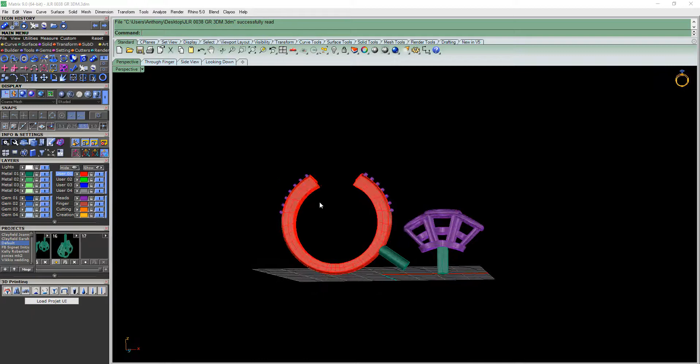Okay, so we've got these two pieces here that we're wanting to support in the Asiga, in Matrix version 9, and then export to the Asiga Composer software so we can create a build.

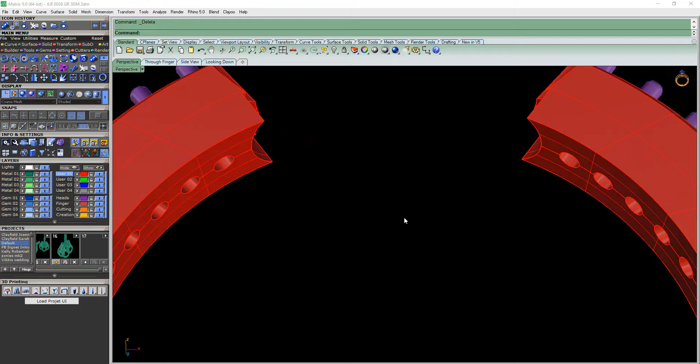Now the first thing I noticed with these is you've got a couple of remnants here, this one here and here. We need to delete those. That's really important. You don't want little floaters hanging around building away, because that could damage your tray, and it's also not very good for the printing of the piece. It can cause issues as well.

So the first thing I'm going to do is select this piece here, and we're just going to hide that. We'll do that one later on. This one here, we're going to delete this sprue because we don't need it. We'll create a sprue with the Matrix 3D printing tools.

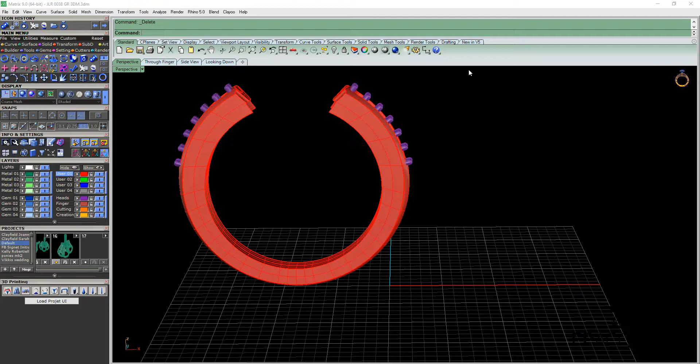So we're going to grab this. Actually, the first thing I'll do is go into the through finger viewport. I'm going to bring out a finger size, size L should be fine, and we'll grab these guys here, pop them all onto the green layer color so they're all where they should be.

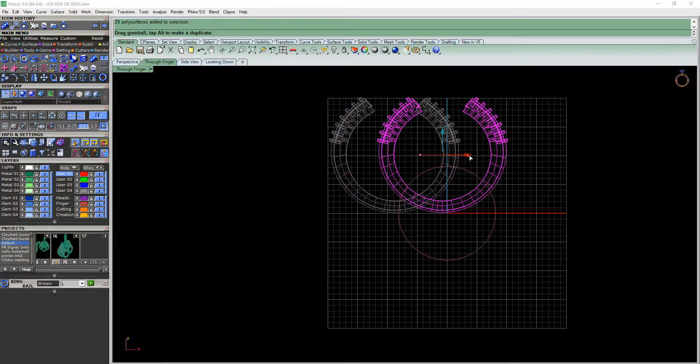Just turn these on, so that's all out. Okay, so we'll bring that down there. Doesn't really matter, I've just got the ring rail out there just so I can put this back into its original place.

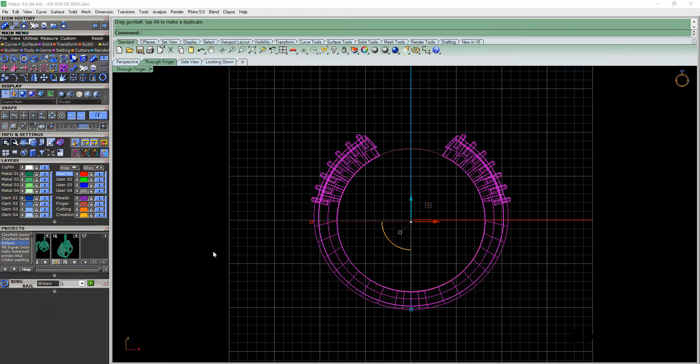There's no reason for you to move things away, particularly a shank, away from where it was created, particularly if you're using these next few tools. Now we don't need the ring rail here, we can get rid of that now. I just had that there for reference.

What I am going to do is go into the blue tools menu and select the tool called 3D Printing. That's going to give me a row of tools that we can use here to create supports. This is in Matrix version 9, which is all good.

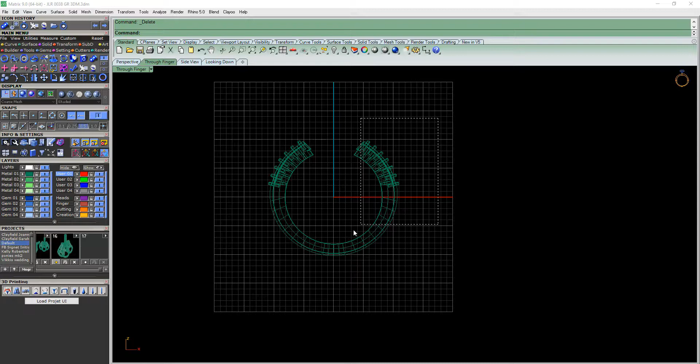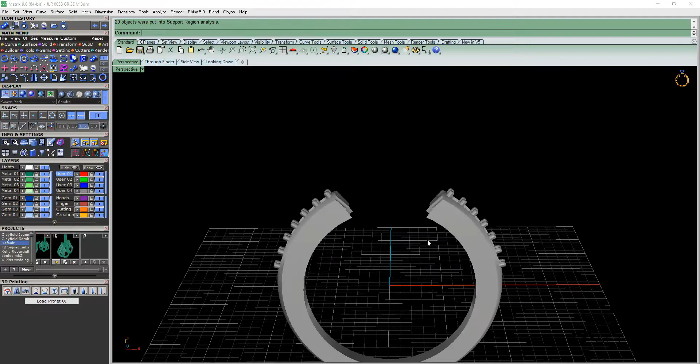So we can select everything here, and we're going to use the very first tool here called Show Support Regions. Now in the toolbar up the top, or the command line, you've got Support Region Analysis options. The very first thing we want to select is Add Object. When we click on that, it's going to shade it to a grey, and then when we have a look in the perspective viewport, anything that's red is indicating that it needs to be supported.

Now these claws here typically don't need to be. They're usually pretty well okay with that because they're attached to the shank. Generally speaking, they're going to grow okay. It's pretty rare that you need to support those. If you do, it's pretty easy to do.

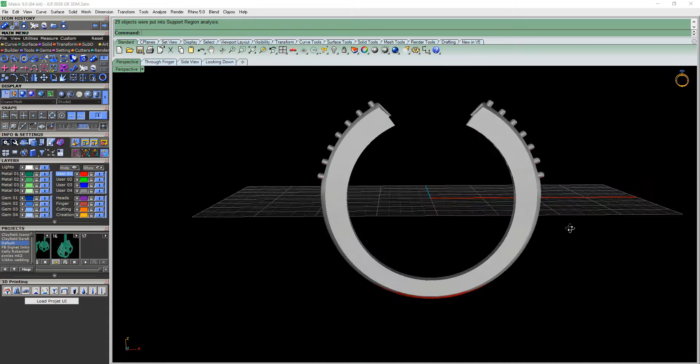So the first thing we'll do is grab our shank, everything there, and select an option here called Ring Support Sprue. When we click on that, it's going to automatically generate a support sprue here for us.

Now this sprue here can be used in the casting process. There's no need for you to create a sprue or a cylinder coming off here. This is actually going to be a better sprue for you because it allows for more metal flow into the piece rather than a cylinder where the metal's just got to come in, hit the wall here, and then kind of turbulate around. That can cause things like porosity and all kinds of bad stuff. So this option here is far better for a sprue, particularly for a ring.

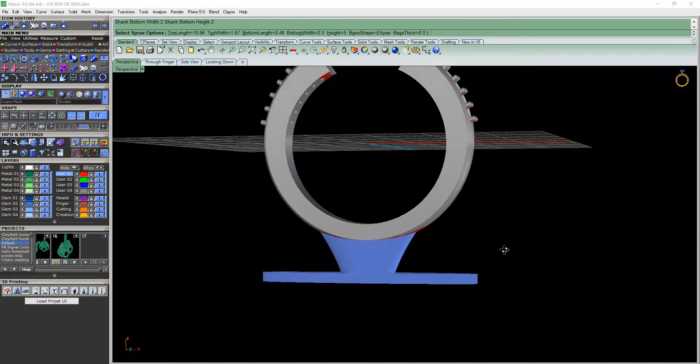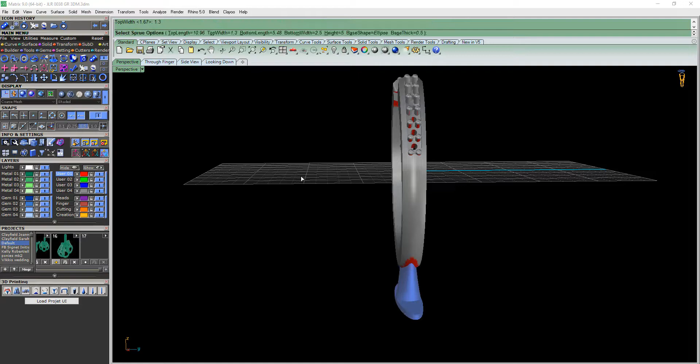Now a few options that we've got up in the command line here. We've got the option to change the top width, the bottom width, the height, all that kind of stuff. I'm going to change the top width from 1.67, I might change that down to say 1.3 and hit enter, and that'll narrow that down there for us.

We can also change the bottom width, I'll leave at 2.5. The height, I usually take this down to about 4 mil or so. You don't need a huge sprue on these things.

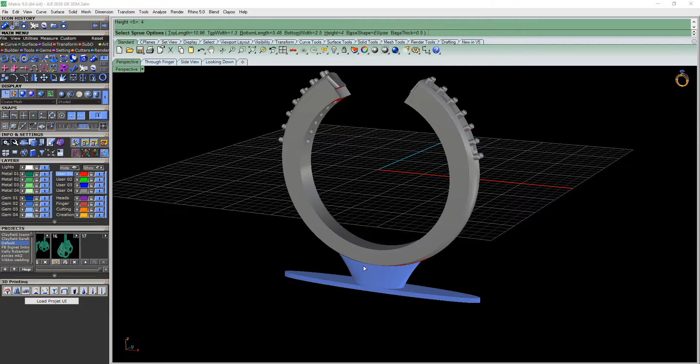The longer the sprue, the more metal you're going to spend. So hit H, hit 4, and hit enter, and that's going to reduce the height of that particular sprue there. Then all we need to do is hit enter, and there is our support for that piece there.

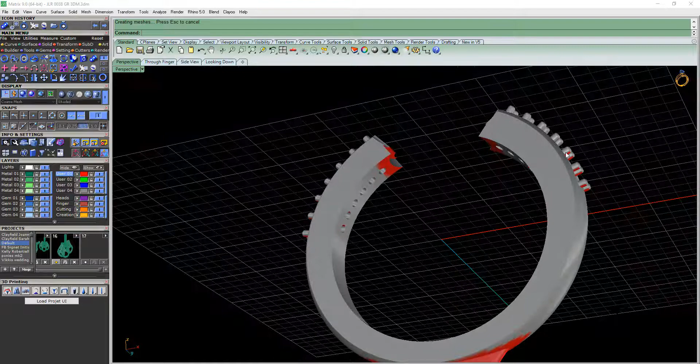Now, with the Asiga, you could probably get away with just growing this as is, but it's my personal preference to support these regions here as well. I don't tend to support the claws here, like I said before, but these guys here I just do just to be safe.

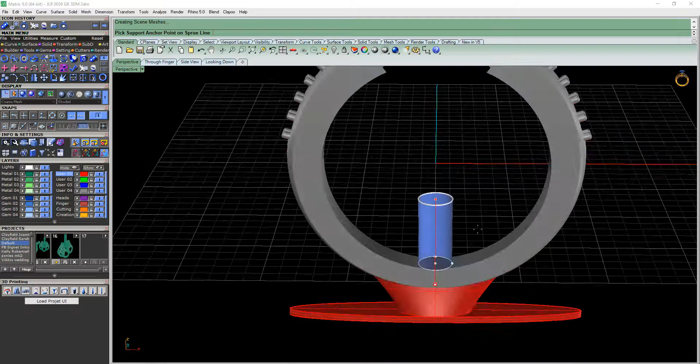The tool that we want to use for that is called Support Ring. It's this one here, so we're going to click on that, and the command line will say pick a support anchor point on the sprue line, which is sitting at the bottom of the inside of the ring, and we want to take that up about halfway for this particular ring.

Left click once, and then just drag your mouse out, and I'm going to turn my snaps off.

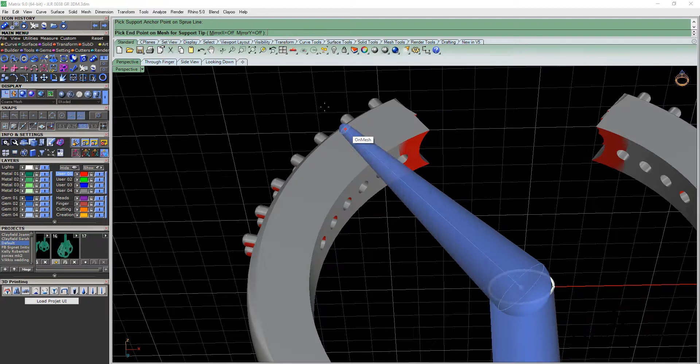Now you've got an option here. At the moment it's only putting one support sprue here, but I'm going to turn mirror X on, and now it'll give me 2. If you have mirror Y on as well, it'll give you 4. So it can really help quicken the process up.

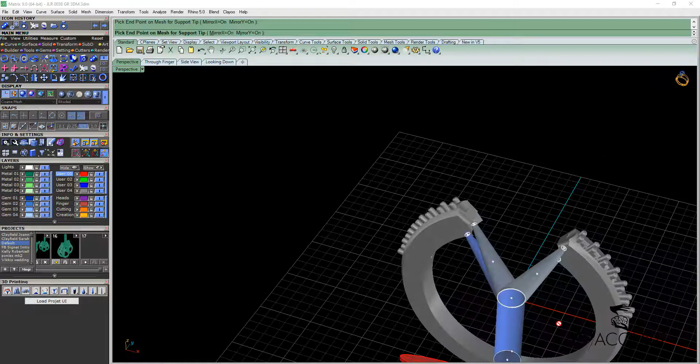So I'm going to leave these 2 here, and put those there just like that. Left click once, and then what we're going to do before we exit out of the command is we're going to modify these, make them a little bit thinner.

So we're going to hit enter, and then when that goes red, left click on it, and then we can drag it in or out, whatever you want to do. I'm going to take that to about 0.7, and then the same for the bottom ones here, bring that down to about 0.7 and 0.7.

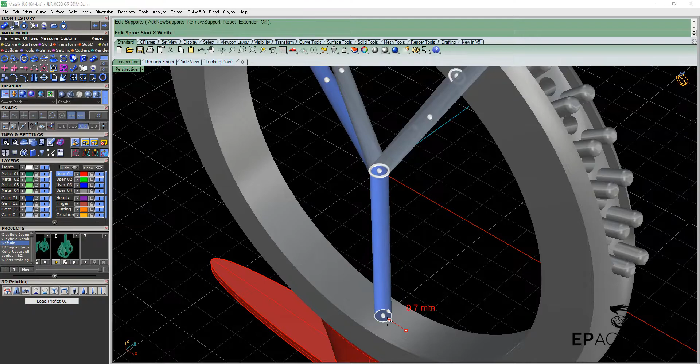0.7 is the smallest size you can go for those particular supports.

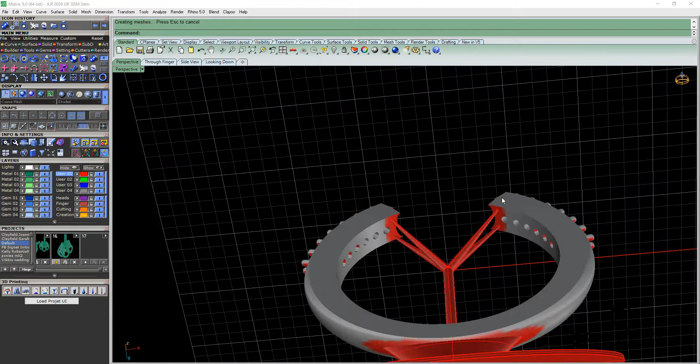And then this one here, because you've mirrored X and Y it, you only have to do this to one of these, so just left click it and bring it down, and that'll modify all the others to 0.7 of a mil. When you're happy with everything there, simply hit enter, and that will set your sprues or your supports for you.

The next step is we're going to select everything here, and we're going to use a tool that by itself costs about $10,000 but was included in Matrix 9 as complimentary. It's found in the tools menu, and it's called Mesh Repair.

It's this icon here. Click on that, and then in the command line make sure that delete input objects equals on. What that's going to do, if you've got that turned off, it's going to leave your original piece, which are all your poly surfaces here, and it will also create a mesh over the top of it. If you turn delete input objects on, it automatically gets rid of all your poly surfaces and just leaves the mesh there.

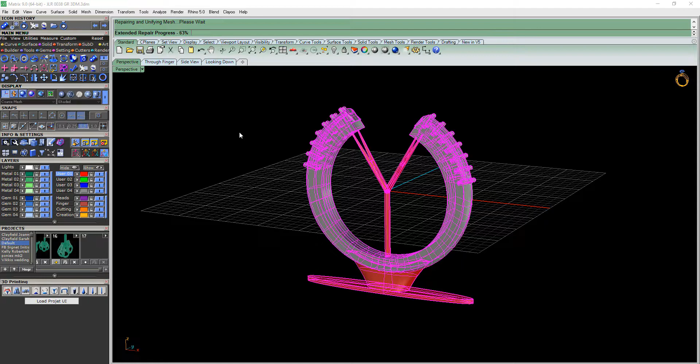So hit enter, and what that's going to do is repair that piece. Now this is really cool if you've got things like naked edges, if you haven't booleaned everything together, all that really kind of cool stuff there.

And what it will do is it will generate a mesh like this. Now this is a watertight mesh. It's ready for 3D printing. You don't have to do anything else to it.

We can go here to check mesh, and if you get the first sentence saying this is a good mesh, it's all you need to worry about. All the rest of this stuff you don't need to worry about at all. If it says it's a good mesh, it's good.

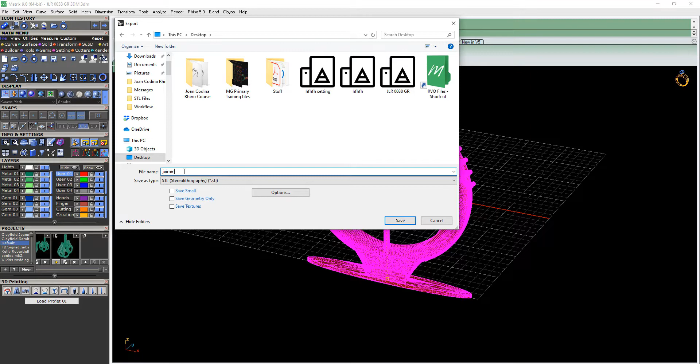Close it down, select it, and then just go to File, Export. Let me try that again, File and Export, and I'm going to take this to the desktop here and give it a name. So Jaime Shank, and hit enter.

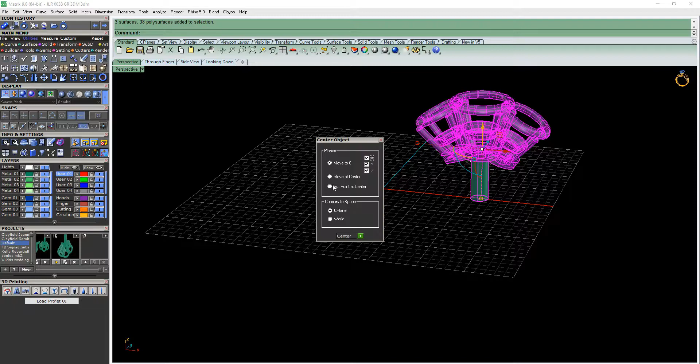Alright, so we've done that. Let's bring out the setting. We'll go to Show, grab this guy here, go into our Utilities menu and use our Center Object tool. Center that right at F4, and check to make sure everything is centered, because sometimes geometry can throw it off a little bit. So I'm going to move it across slightly, something like that will be fine.

They don't look like they're the same, so let's delete this guy here and mirror that around F4, so at least they're all the same.

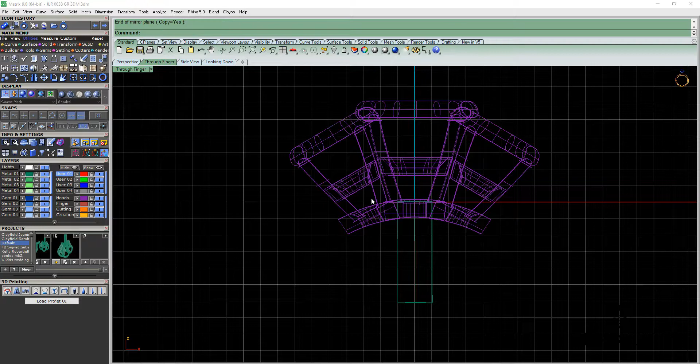Next we're going to go to our perspective viewport, select everything there, go back to our Tools menu and select the 3D Printing option. Go to the very first icon, Show Support Regions, and click Add Object. It's going to convert it all to grey—anything that's red is recommending support.

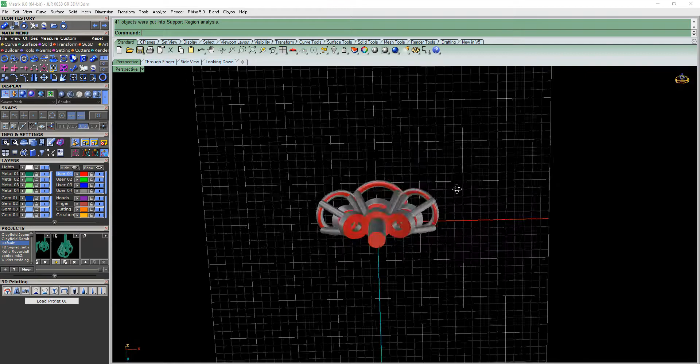This center cylinder here acts as a sprue, or a support and a sprue, I guess, so that's okay, we can still use that. What we're going to do is use a tool called Support Base. Click on that, and the command line will ask us to select our object, so select that and hit enter, and that's going to create a support base for us, so just hit enter.

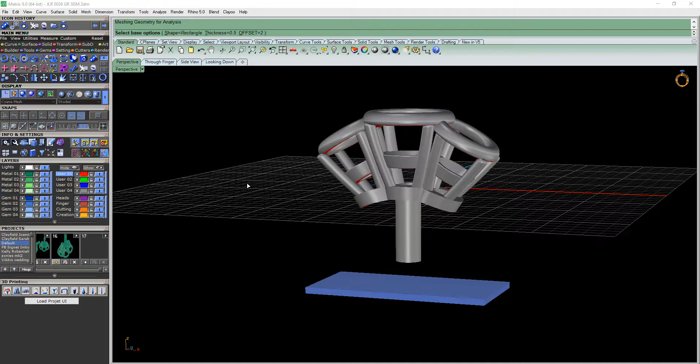We're going to drag this up just so the support intersects our cylinder there, something like that will be fine. If you can see it, it goes right through it. That's good.

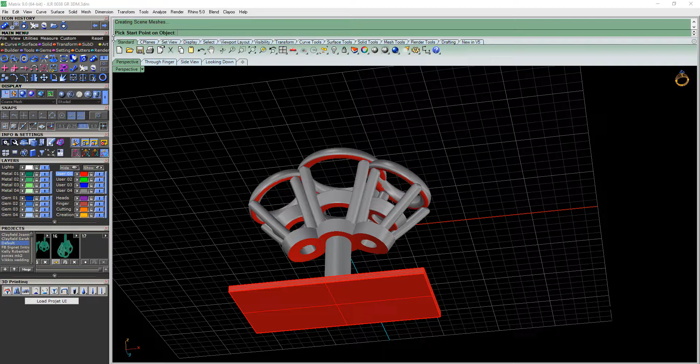We're then going to use a tool I tend to use only for settings and things like that, called Blend Supports. Click the little arrow in the corner there and use the first option, Blend Supports. It's going to ask you to pick a start point on the object, and the start point is going to be, say, here—anywhere around there is fine.

We're going to turn Mirror X and Mirror Y on, leave those on. The start diameter you can take down if you wish—I'm going to leave that at 0.3 and leave the end diameter at 0.3 as well. Then it's going to ask you to pick some other points.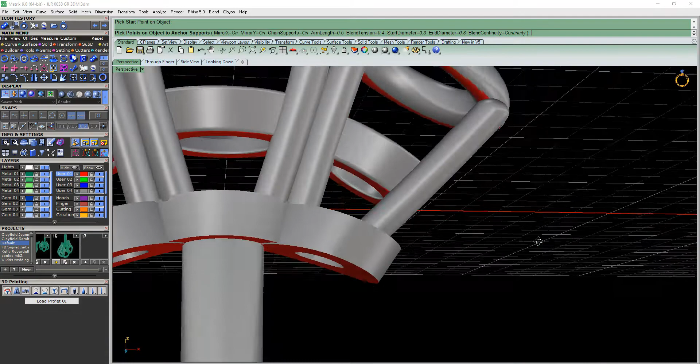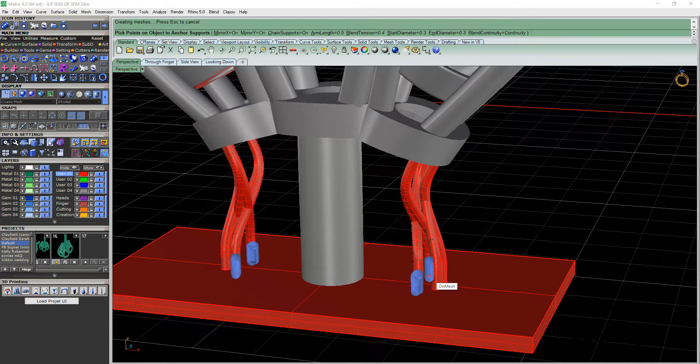So we need to pick some points onto the support plate itself, something like that there. Then you'll see if you move your mouse, you can go back up and then back down to the support plate, keep going back and forth—back up, back down, and there, and there—and once you've done that, hit enter.

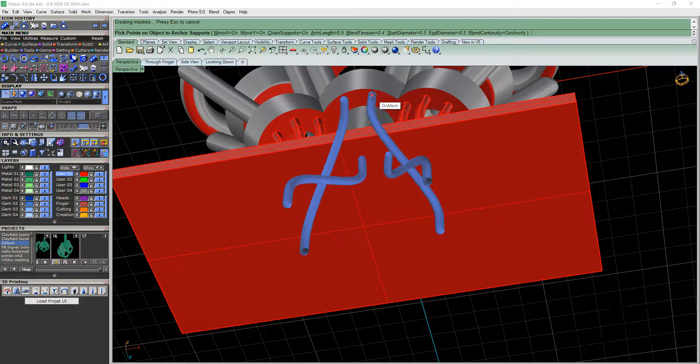Alright, that should be okay, and that'll all grow nicely, believe it or not.

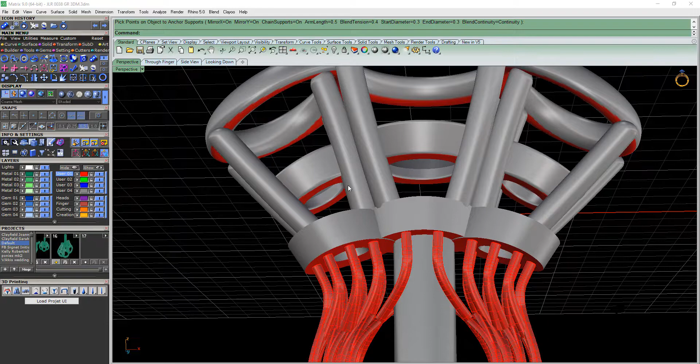The next thing we need to look at is these underrails here. I wouldn't worry about supporting these side underrails—they're supported by these claws here, and this one here is as well.

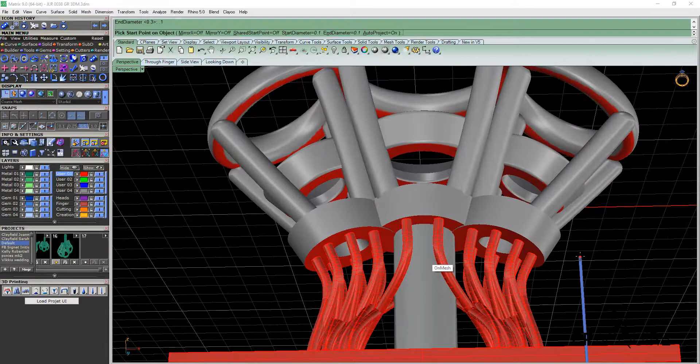It'll probably still grow, but if you really want to be safe and you're not 100% sure, go down to this tool here, the very thin supports. Take the start diameter down to about 0.1 and enter, and the end diameter down to 0.1 and enter. It's only going to be very thin, but that's okay. Turn Mirror X and Y on, so you only have to do it once, and take it up into here, and that'll do.

Alright, they will pop out really easily, there's no problem there at all. The next thing we need to do, if you really wanted to keep these circles here—

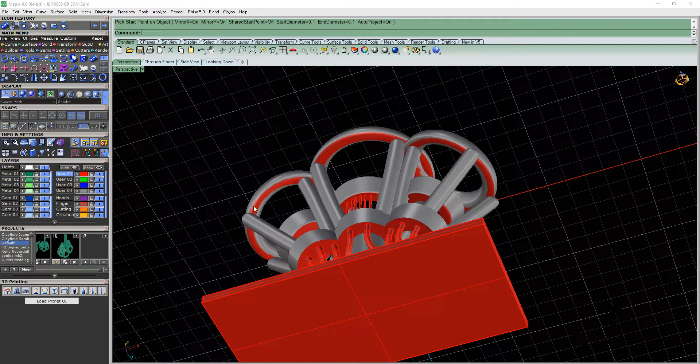then you could. I don't tend to, but we're going to go to this next one, the Medium Tapered Supports. Select that one there, turn Mirror X and Mirror Y on—you don't always turn these on either, I'm just turning them on for this particular piece to save some time. Start diameter I'm going to put at 0.2, and the end diameter at 0.6, and hit enter.

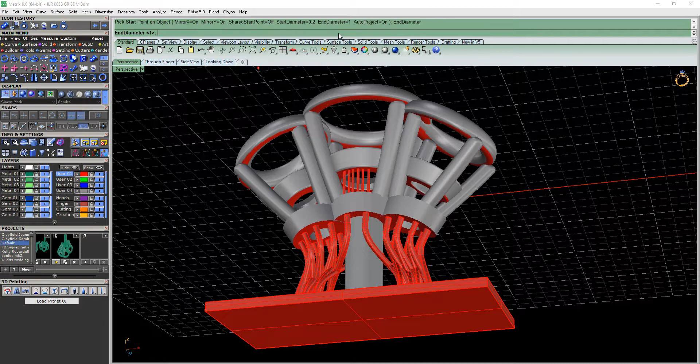And then just simply go around and support these sections.

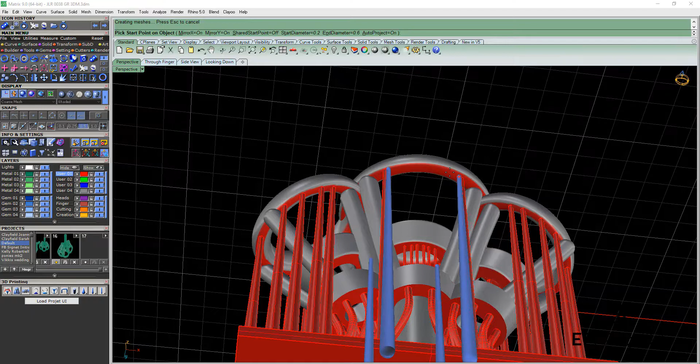And that'll just really help it grow without issue. You won't have any remnants left in your tray or anything like that, which is really important. You just don't want remnants left in there because they'll damage the tray otherwise.

Hit enter when you're done there, and then once you're happy with all of that, just check it over, make sure that there's nothing sticking through the bottom here, which there isn't. Select everything there and go to mesh repair. Make sure delete input objects equals on and hit enter, and it will go through its process.

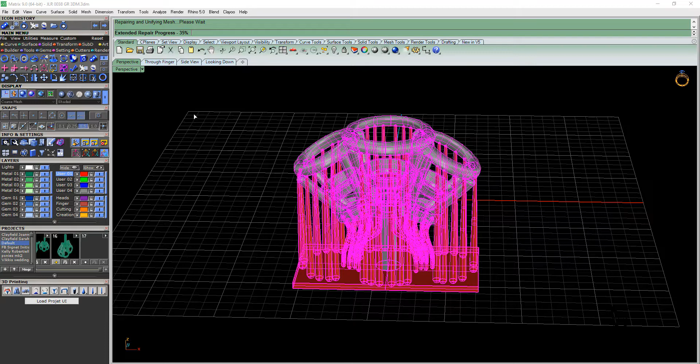Okay, so now that that's finished with mesh repair, we can click on check mesh, and it says that it's a good mesh, so that's all good.

We can close that down and we can select it, go to file and export. Make sure that you have the STL option turned on, and I want to save that to my desktop, so I'm just going to call that jaime setting.

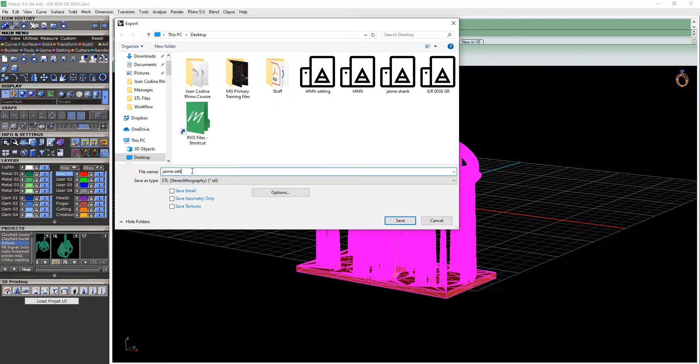And hit enter. Alright, so now that they've exported, we're going to then open up our Asiga software, and the Composer software that is, and we're going to click on New, select our material that we want to use, and obviously the thickness that you're wanting to use.

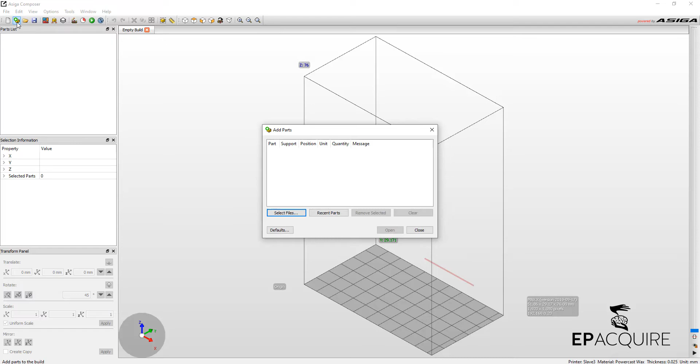We're going to hit OK to that, and then we're going to add our models by clicking on the little plus box. So select your files, we're going to select jaime setting and jaime shank and hit open. And I'm going to print 2 of each, so just grab that up, 2, and hit open.

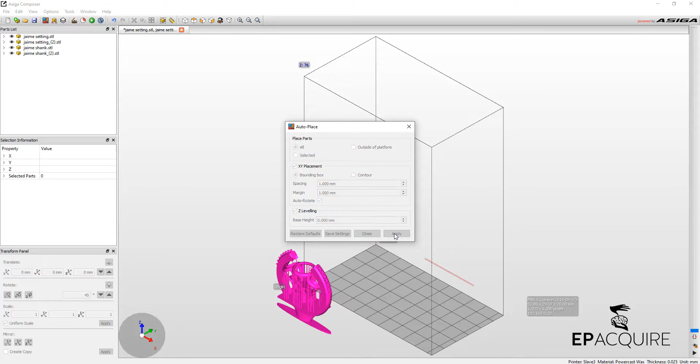I'll bring those in, and then we can simply auto place those. Just hit OK or apply, and then close that down.

And then what I tend to like to do is I like to manipulate these, so you can click on each one and just hold down your left mouse button. When you've got the green hand there, just bring that across. Same thing for this one here.

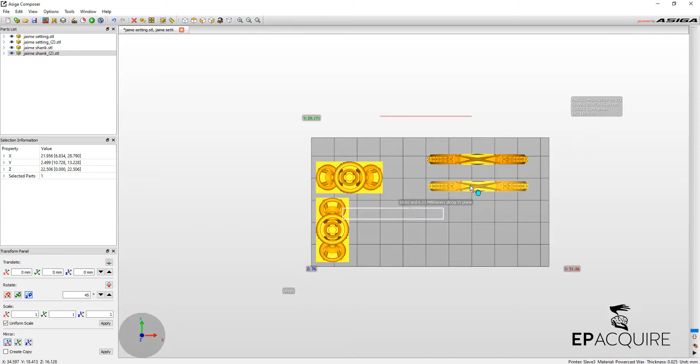We can rotate it around, say, and just drag that across to where we want it. This one here, I'm going to rotate that around as well. You don't have to do that too. And just going to drag that in.

I just tend to like building in the center of the tray where possible. Alright, so once I've placed all of those, we're going to then build.

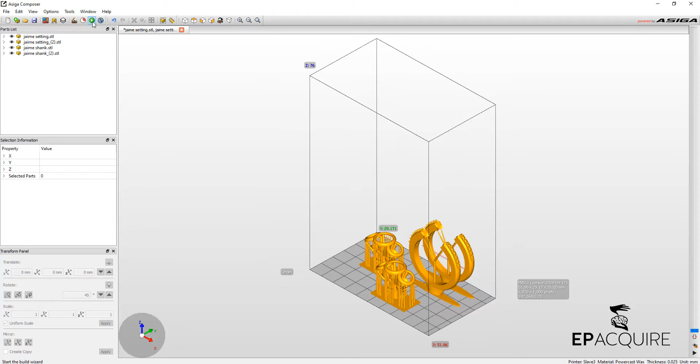So we're going to click on the green build button. It'll give you an estimated time, which we're going to click on next. I'm okay with that. And then you're going to get this message.

Now, because you haven't created the supports in the Composer software, that's why you're getting this message. But you know that you've already created those supports, so you can just simply disregard it and just hit continue. And just go through the paces.

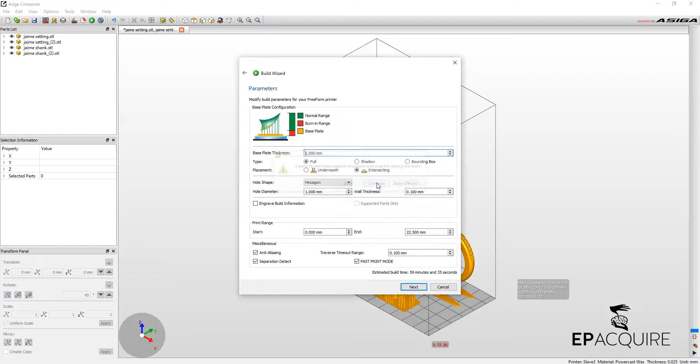So next, and you can give it a name. So I'm just going to call this Jaime. And you can hit send build. And once you've sent that build, then your printer, it'll show up on your printer, and you can hit print and off you go, and there shouldn't be any issues whatsoever with growing those particular pieces.

So yes, it is a little bit more hands-on as far as, or in comparison I guess, to the auto support function that you've got through the Composer software. However, I personally find that if you're not doing 40 models a day, then it's not really a big deal, and in my opinion it's kind of a little bit more of an insurance to make sure that the pieces do grow correctly.

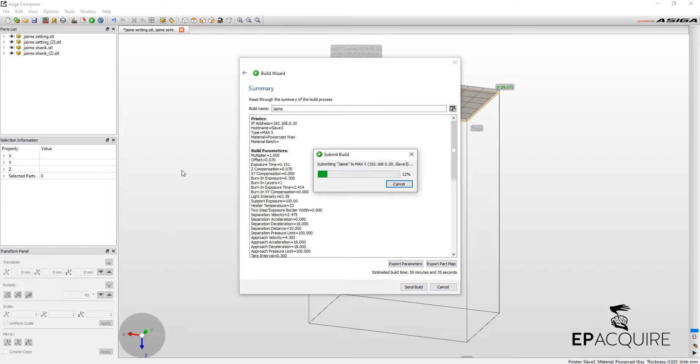So that's the way I tend to do it. I generally, anyone who's got Matrix, I generally recommend they do it that way as well, because you've got a little bit more control and you can place the supports pretty much where you want. Alright, I hope that helps.